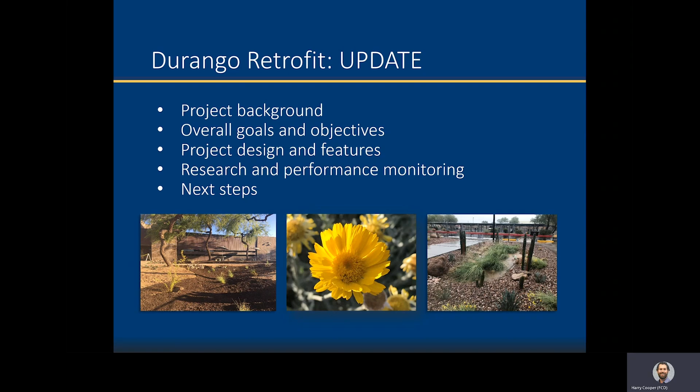Today I would like to talk with you about the Durango campus parking lot landscape and water conservation retrofit project. In this discussion, we'll go over the project's background, the overall goals and objectives, some design themes and key features proposed in the design, as well as data collection and research opportunities and performance monitoring post-construction. Then we'll end with a discussion of next steps, including tentative schedules about when we plan to construct.

None of this would be possible without the help in design and production of construction documents with our design consultant team led by EPG and Mr. John Griffin, along with sub-consultants WERK Urban Design, Kimley Horn and Associates, West Consultants, and Ninyo and Moore.

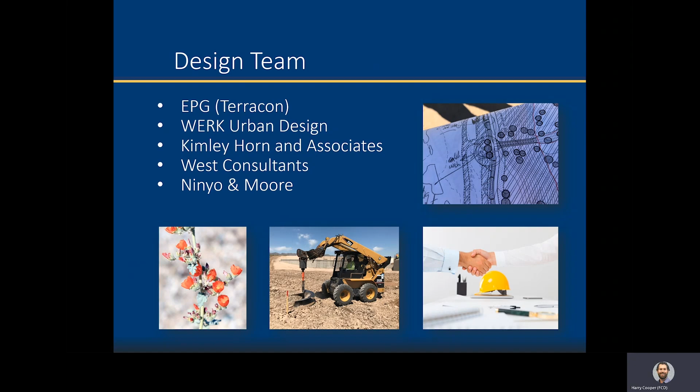To really get to the start of our discussion here, let's speak a bit about the district's role in stormwater management. The district's mission, the main focus here, is protecting people and property from the damaging effects of flooding. And we've been doing that since 1959.

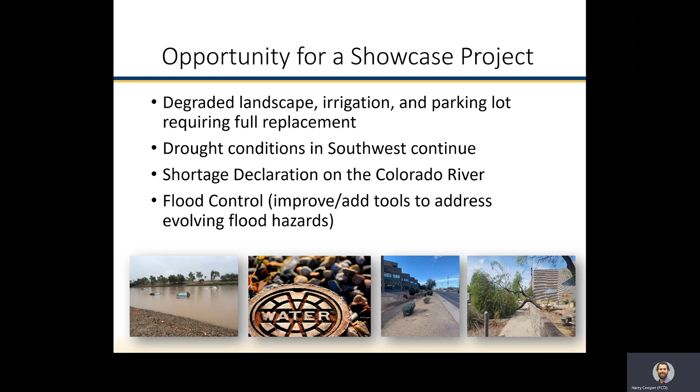Previous efforts getting here go back to 2017, when Kaylee Coulter, a landscape architect in the Valley who also works at ASU, put together the original master plan, working with me on that. It was an attempt to put as many different features as possible into the space, and it was oriented around kind of a walking tour.

In 2019, J2 came on board and helped us out with a feasibility and costing analysis to look at the overall campus, put as many things as possible into it, and see if it makes sense. Can it be done, and is it cost effective or cost prohibitive? That was looking at a 20-year time horizon, and it again tried to include as many different techniques as possible.

Then in 2020, EPG came on as a design consultant. We put out a benefits and merits report, looking at it again in a little more detail with a better design, one that's a little bit beyond conceptual, about 45%. And then out of that, we felt comfortable enough to move forward with construction documents that were done in 2022.

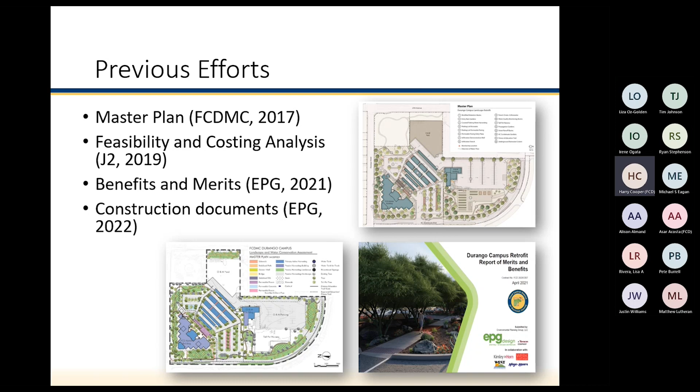Throughout all of that, the project goals have pretty much remained the same. The major one is reducing water, so we have a goal of reducing potable water use on this property by 50%. I think we're doing better than that, where we're at 60+% as it sits right now. We also want to use green infrastructure and low impact development techniques to better manage stormwater. And the third goal is to use this as an educational opportunity to showcase all the practices that are possible in the valley.

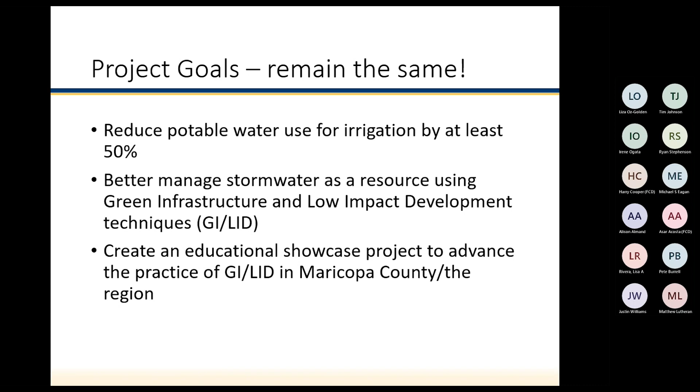So what makes this project different? There's a lot of green stormwater infrastructure already out in the valley, you can see it when you drive, and we've talked about different case studies around here. What makes this project different than some of the others that have been produced is that we're really looking at the background data. It's a data-driven design. We're thinking about it holistically, trying to incorporate all of the interactions and all the different features, not just putting things in because it seems like a good place to do it. We're doing it for all the right reasons.

We have actually done hydrology and hydraulic modeling on the site, which typically, from what I understand, is not done that often. We're still trying to include a suite of different features, so we have an opportunity to look at those and see how they perform, and that's going to help us out with educational opportunities. And then research and performance and maintenance strategies on the back end, which I'll talk about a little bit later.

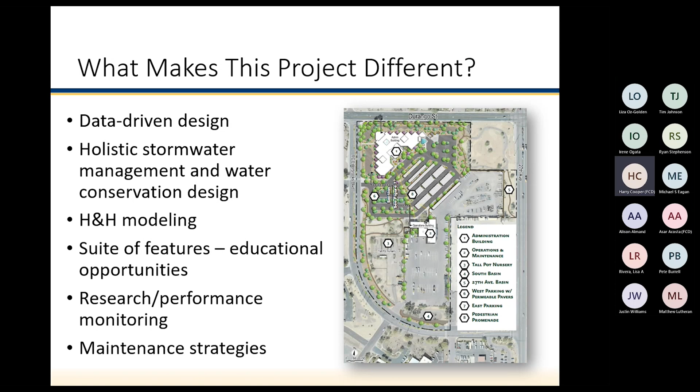One of the data-driven elements here is this water budget. This was done to look at the potential water availability we had from rainfall, looking at what the plant demands were, and understanding how much potable water we would have to have. So if we're going to meet that 50% reduction, how many plants can we put in with the amount of rainfall that we have, and then how do we capture that for reuse at a later date when we have drier periods. All of that was looked at from this water budgeting perspective.

Some other key factors that are important to mention: we're trying to look at the right plants for the conditions. We're not just putting in any plant, we're trying to put in drought tolerant plants that use minimal amounts of water and can establish and then eventually get off of irrigation, which is why we include a smart irrigation system with soil moisture sensors that can help understand when it's wet so we don't turn the water on, and also gives us the ability to turn off sections of the property altogether.

I'll add in real quick, a lot of times it's really easy to just say, okay, we're going to take this square footage and we can capture this many gallons of water. But what we did was break things down by the month, knowing that we get our biannual rainfall, our summer monsoon, and our winter rains. When everything is getting stressed, say like May and June where we're not getting any rain and the demand for the plants is going through the roof on water requirements, that's when you really start seeing the potable water requirements go way up to capture that. So instead of just looking at it for the year, we broke everything down by the month and showed what that is. It shows us where our deficits are. Yeah, it's absolutely an important aspect.

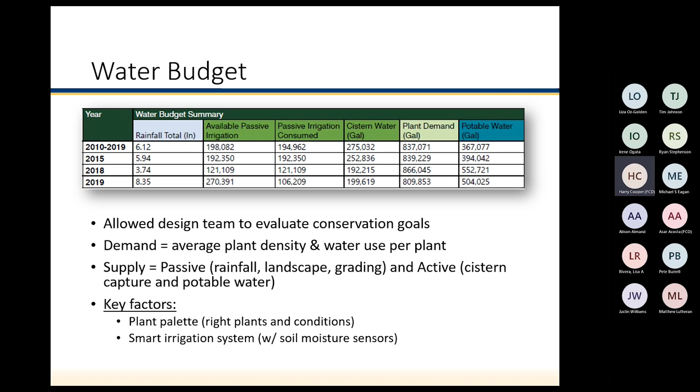H&H, so this is definitely not my area at all, maybe Brian will say something if I mess it up, but we use PCSWMM for modeling. We actually modeled the entire property, divided it up into a bunch of mini watersheds. Then on the downstream end we put in a feature, so we're going to have a swale that captures a certain volume of water in that mini watershed, and we try to optimize that. Looking at whether it could be a half inch of rain or a 1 inch rainstorm, we stuck with the 1 inch, that was a 90th percentile rainstorm, so most rainfall events larger than 1 inch are pretty rare. The idea there was to build our features and our passive and active capture with that 1 inch rainfall parameter.

So the graph here on the bottom right, I'll talk about this. This is just us looking at the watersheds, trying to divide those, and then Kimley-Horn went ahead and in the model broke it down into all these little watersheds. Each one of these, water will land in that space and then go into these red areas, which are the GI features, and then we try to understand how big they need to be in order to capture the volume of water that lands in that space.

Then this graph on the left-hand side is a simulated 1-inch rainfall event for the existing basin on the outside of the property. So we have 2 stormwater basins that you're required to have for, I don't know what the size of the storm is, Brian, do you know? The 100-year, 2-hour? 100-year, 2-hour.

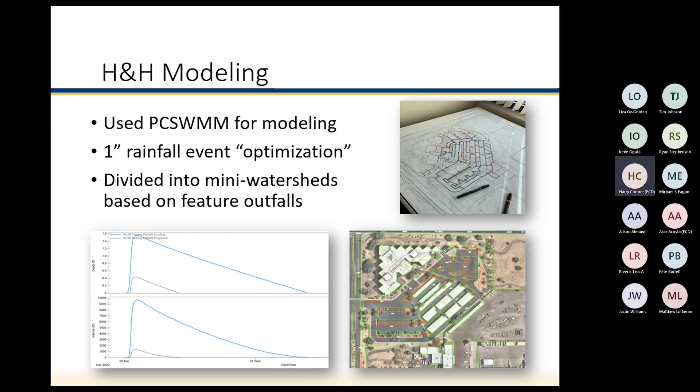Passive and active stormwater capture. Talking about this, these are fantastic graphics that Jesse put together, by the way. Kudos to you guys for doing that. They're great views on everything.

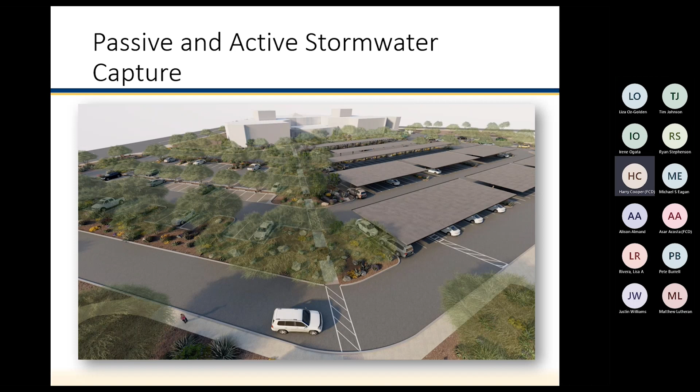The passive and active stormwater capture - what we're talking about here is on the passive side, wherever the rainfall lands on a parking lot or in the landscape area, it's immediate use by the plants, or it's getting infiltrated, or it's evaporating. But we're not doing a whole lot in terms of grabbing it, holding it - we're trying to use it right away. The active side ends up being the cisterns, which Jesse's group had a lot of work involved in putting together. We're capturing all of the water off of all of the roofs, all of the shade structures that we can, and then that's delayed reuse - we'll gather it, hold it, and keep it until we need it in the really dry months.

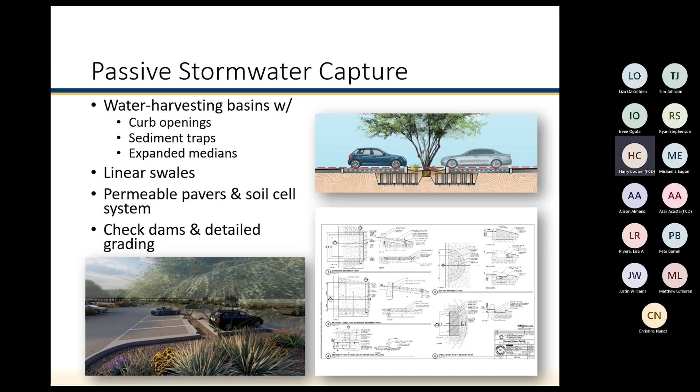Just the passive stuff here, rainwater harvesting basins. We've had a bunch of different features involved in that - I think we did 6 or 7 different types of sediment traps and curb openings, so we can explore how those perform over time. We also have permeable pavers on top of soil cells, but then also in other areas without soil cells underneath. We have kind of the separated swale, linear swales through there. We have check dams as well installed.

These are the 2 sheets from the plan set on the soil cells, which are really hard to read. They're huge columns in the ground. The thing here I think is really important to remember - it's not just for stormwater capture and getting it into the ground, which they're really good at doing, but it's also providing better root zone for the trees to grow, so they don't get compacted soils and die an early death in the parking lot.

And then the sheet on the right, which is really super busy, and I did that on purpose - that's a grading sheet. We worked really hard at micro grading the parking lot and all of the landscape areas so that the water flows where we want it to flow, capturing every bit of it that we can.

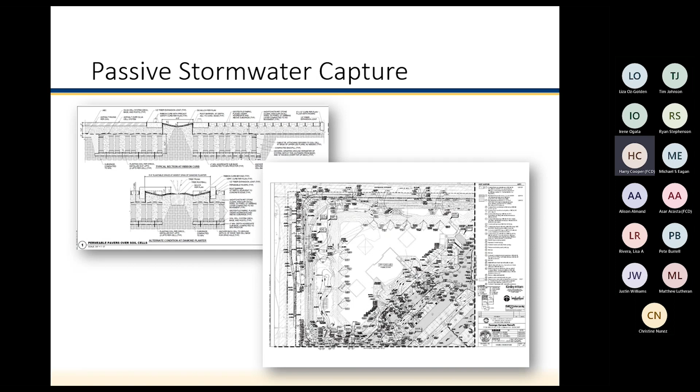Some active stormwater capture - these are 2 different examples of the above ground. This is underground cistern and then above ground cisterns. We have a total of 7 of them proposed with over 50,000 gallons of capture. And that would be filled a few times over the course of the year - we have winter rains come in, they fill up, and then again in the summer.

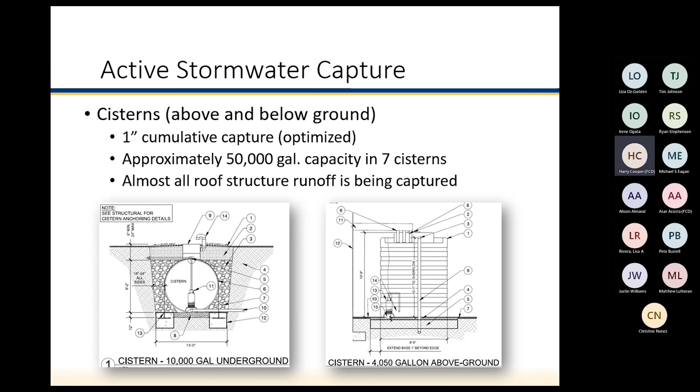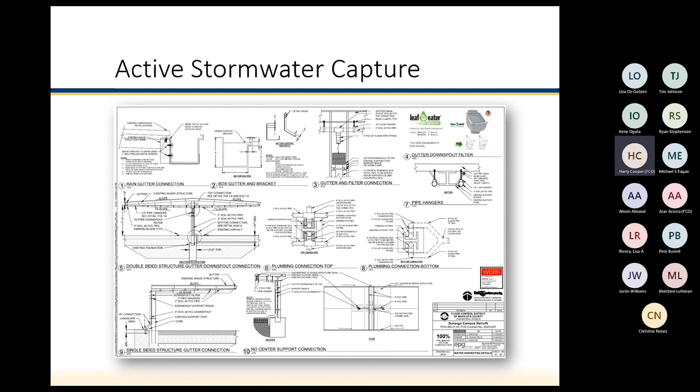And then the key point here is that almost all of the roof structure runoff is being captured - so that's this building, O&M, and then all of the shade structures as well. Another busy sheet here, just talking about all the drain connections for the shade structures. We have all kinds of piping that goes underground, gutter systems. It was pretty detailed work in order to try to maximize that capture.

Then the O&M building as well, which is a different layout to an above ground tank on the backside. Important part here is that we have a cistern system set up that's all tied together with a controller with pumps that hook up to the potable water or to the irrigation system, and then they get pumped out like a normal irrigation system.

But this particular example, what we're doing here is in the back of the lot, we have a tank that we're going to have set up as a gravity feed. So there's a different way of doing it, if you will.

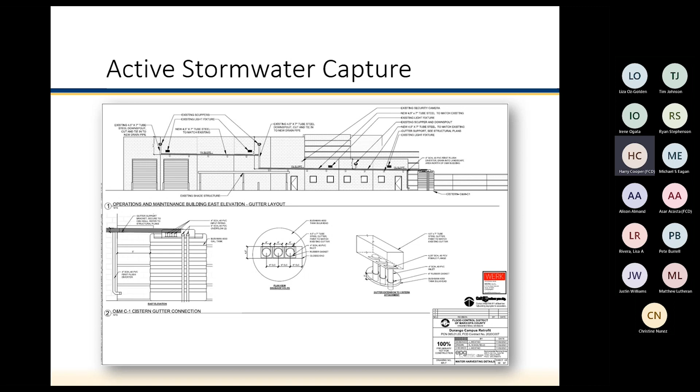All right, just a couple more here.

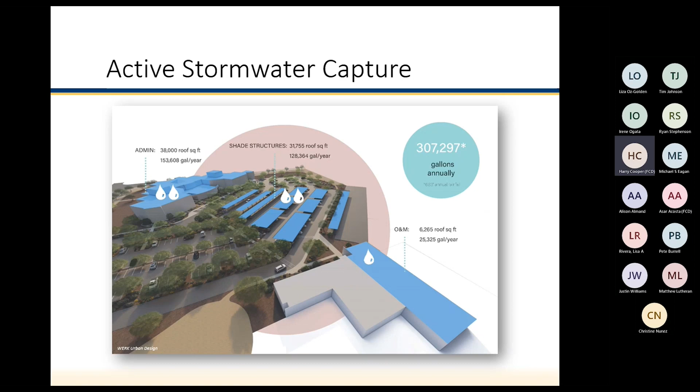We talked about the smart irrigation system using desert adapted plants. It's a critical point just to capture all this water and then put out a plant that uses five times as much water - doesn't make a whole lot of sense. We're including soil moisture sensors so the irrigation system remains off until it has to come on. Right plant in the right place.

I know you've heard that from tree and shade master plans, but it's important to think about that in terms of GILID as well for the inundation zone. Part of the work Wayne had done on the back of the LID handbook was about where you put plants. You don't put a prickly pear cactus in the bottom of the swale where it gets wet roots all day long - it doesn't need to be there, it needs to be up and away from the water. But other plants like grasses may need to be down in the hole. We attempted to do that, and we want to come back and look at how successful we were.

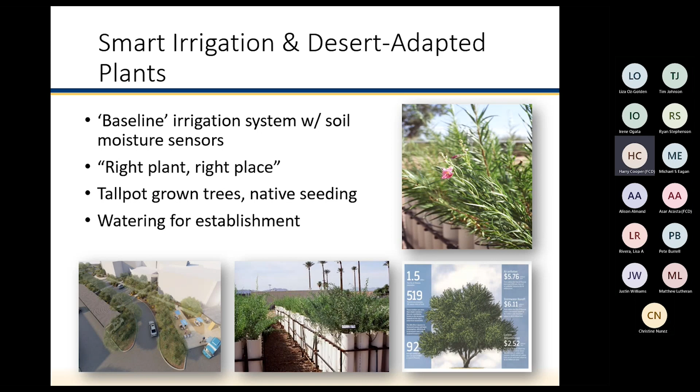Again, the tall pot trees, native seeding, and the watering for establishment. The idea is we're installing an irrigation system that we'll keep running to get all the plants established, then slowly turn it off. Some areas get completely turned off, and other areas will have it on, but only when it's really needed.

Durango Street - we're also looking to be connected to the community a bit. The road you came in on, Durango, has been flooded numerous times in the past couple of years because their storm drain is undersized. They could go in and build a new storm drain at a cost of millions of dollars, with huge impacts to the road. Instead, we're installing a series of scuppers, reversing them to pick up the water off the street and bring it into our existing basins.

The advantage for us is that we'll take it in here rather than just dropping it in right away. We're going to put it in a long linear swale, slow it down, use it, put plants in here, and then drop it into the space later on when it has to go in there.

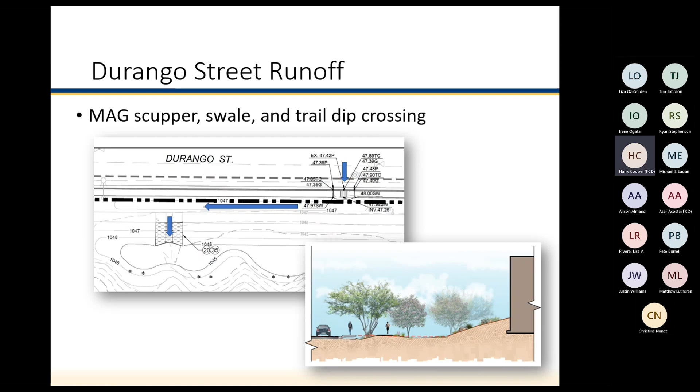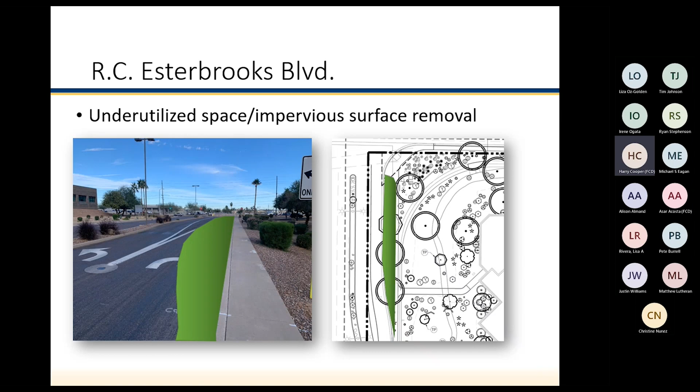Esterbrooks, the last little bit here on this one. One of the things about GILID we don't really talk about is looking for swales and chicanes and different techniques, but this is one we should think about all the time too - just removing impervious surfaces. We're working with McDOT on trying to cut down the lane. There's a huge open space of asphalt that you can't drive on, it's just open. So we're pushing the lanes over to two lanes on this side and turning this into a landscape median that will pick up the water off of Esterbrooks and bring it into the project as well.

The last couple slides here about data collection. This is the part I think is really important. We can install this stuff, but if we don't know how they function and we're not collecting data on how long they last and what benefits they have beyond just capturing water, I think we're missing it.

The different types of data collection we're looking for: water quality and volume. We want to measure flow rates, infiltration rates. We want to understand how soil moisture, how the soil dries up after a storm and how long it takes for that to happen - does it happen, does it improve over time as plant materials mature. We have the ability to measure rainfall precipitation right here on campus - we're a flood control district, we have a gauge right outside that does that really well.

We want to understand how we can address irrigation variability. And we're starting to get into some of the other co-benefits, like thermal comfort - we're looking to have ASU come around with the MaRTy cart and measure temperature post-construction. Then, a few years down the road as plant materials begin to mature, looking at soil health. These are just data points we can collect as the plant materials grow, and that has a whole bunch of impacts on how these things function.

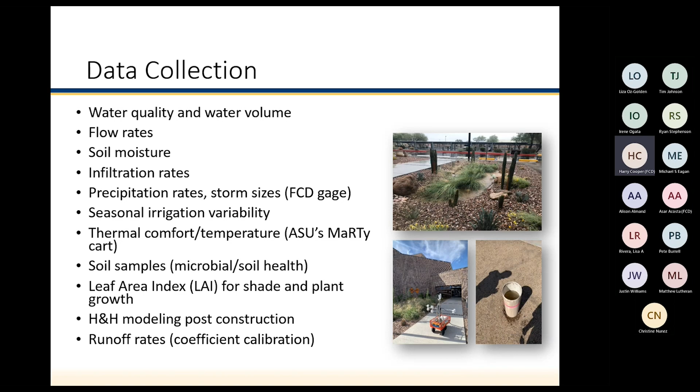And then again, we want to be able to go back and see: did we get it right when we modeled it? So model it in the real world and see how it actually performs, and then look at runoff rates and similar stuff.

So the research opportunities, right? We really want to be able to measure how these things capture water. Are they helping to reduce the overall volume in a rainfall event? Are they reducing peak flows? Are we improving water quality by introducing plant materials and running the water through the landscape instead of it just running off the roof, onto the parking lot, and into a storm drain?

Infiltration rates, this one's really important from my end. I think here we're talking about these green elements to improve function. For me, you can dig a swale and put water in it. Once we introduce plant materials, how do those plant materials help improve the functionality of that feature over time? I would say that they do. I think they increase infiltration rates, they break up the soil, they improve the soil's infiltration, cool the air, create microsites for other plant materials.

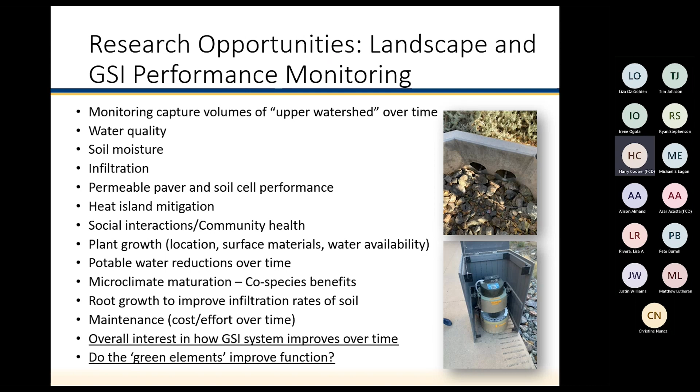So there's a whole bunch of stuff in here that we were looking to the outside community, as well as ASU, to get involved in doing research and doing write-ups on this function and performance.

So again, kind of going back, why does it matter? We're in a drought, 23 plus years, one water approach. I know you all heard that before, but it's important to restate. We look at water as all one water. We need to include flood and stormwater — it's not just nuisance water that we get rid of. It's important. We look at wastewater. We should be looking at this as well.

And so how does the district get ourselves involved in it? It's not just new supplies, but continuing to look at that demand reduction — right water for the right use. We spend a lot of money pumping water from the Colorado River to here, cleaning it up to potable standards, pumping it through infrastructure to your house, and then putting it out on your plants. We should just take the rainfall and do that. It's a lot cheaper and it's smarter.

And then part of it is influencing perceptions of desert landscaping. If we don't change everyone's mindset on how to have a desert landscape, then we're missing it altogether. We're still using too much water — 70%, is that correct, of our residential water use is on outdoor landscaping. We need to change how we view a desert landscape.

For me and the district, the really important thing here is to try to get LID to be a vetted tool for flood control, to show its impacts. Riverside County has the LID manual that allows these features to be used as offsets, and I think it's time we get to that place as well. The more evidence-based design we have, the more resilient solutions we're going to have.

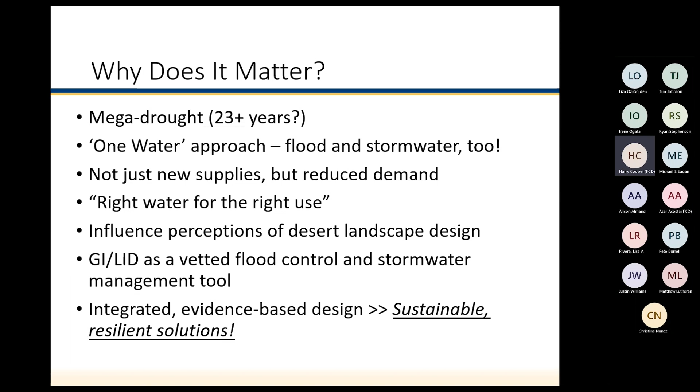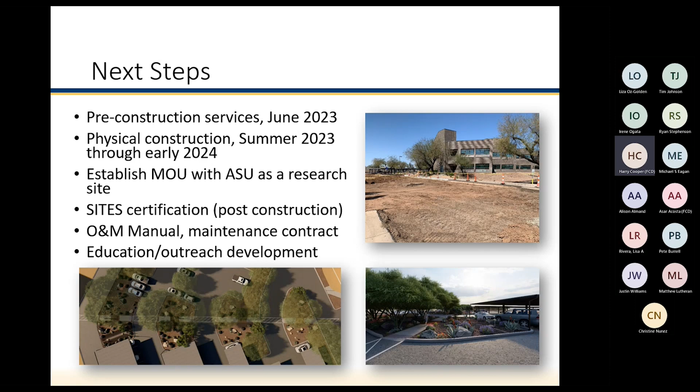And then the last bit here is the education and outreach component. We want to have a walking trail, a virtual tour, and kiosks out there, bring in students, and give anyone who comes here an opportunity to look at it and access our data so they know what's happening.